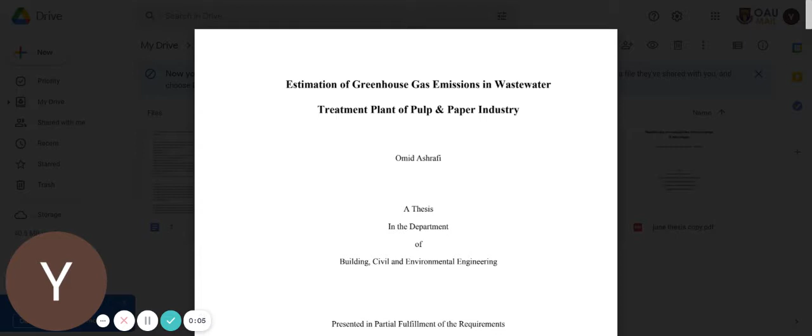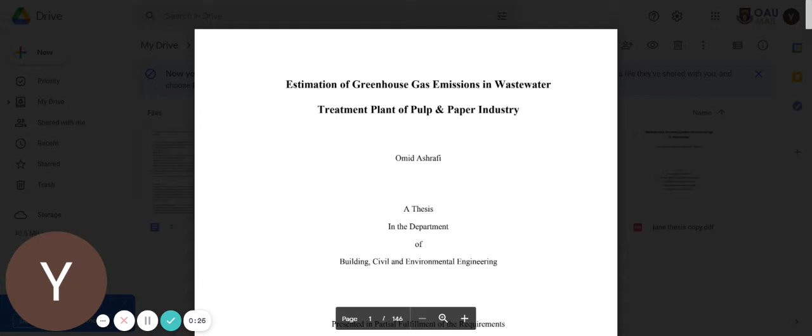Good day. Today we'll be reviewing the research, and the title of the research is Estimation of Greenhouse Gas Emissions in Wastewater Treatment Plants of Pulp and Paper Industry by Omid Ashrafi, a thesis in the Department of Building, Civil and Environmental Engineering, presented in partial fulfillment of the requirements for the degree of Doctor of Philosophy, Environmental Engineering at Concordia University, Montreal, Quebec, Canada. June 2012.

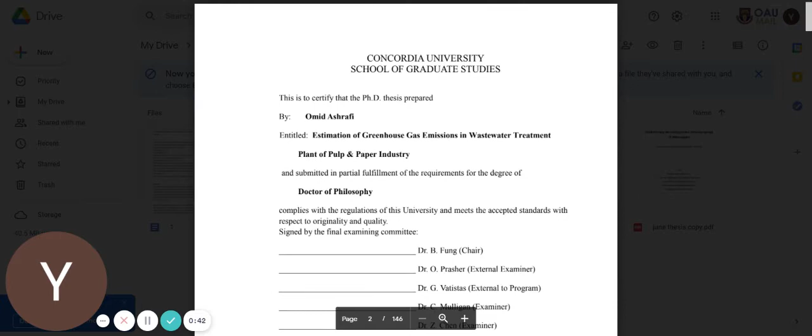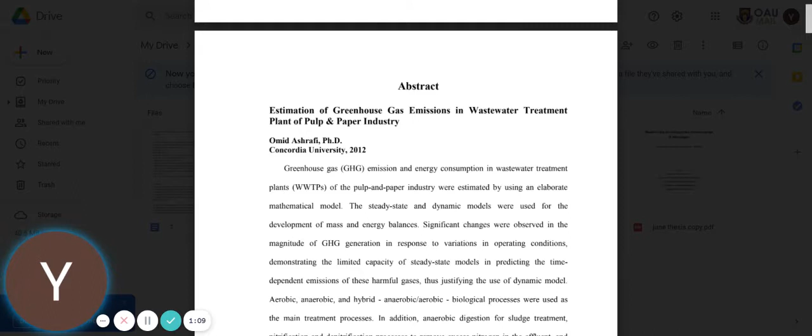This is the abstract section, and this abstract is the summary of the thesis. It says estimation of greenhouse gas emissions in wastewater treatment plants of pulp and paper industry. Omid Ashrafi, PhD, Concordia University, 2012. Greenhouse gas emission and energy consumption in wastewater treatment plants of the pulp and paper industry was estimated by using an elaborate mathematical model. So the author makes use of an elaborate mathematical model for his research work. The steady state and dynamic models were used for the development of mass and energy balances.

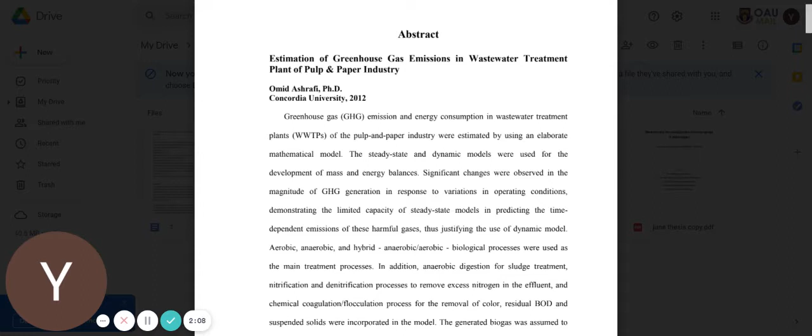Significant changes were observed in the magnitude of greenhouse gas generation in response to variations in operating conditions, demonstrating the limited capacity of steady-state models in predicting the time-dependent emissions of these harmful gases, thus justifying the use of dynamic model. Aerobic, anaerobic, and hybrid anaerobic-aerobic biological processes were used as the main treatment processes.

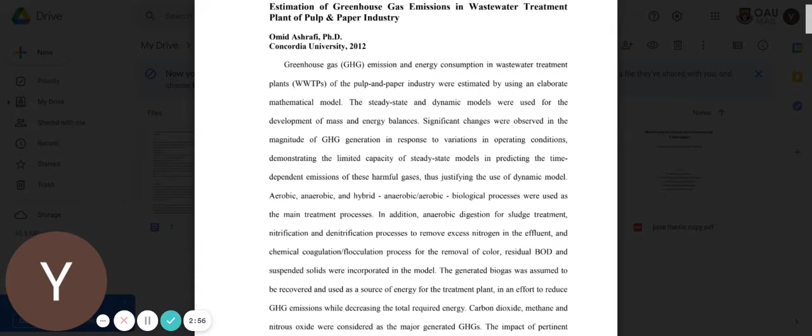In addition, anaerobic digestion for sludge treatment, nitrification and denitrification processes to remove excess nitrogen in the effluent, and chemical coagulation flocculation process for the removal of color, residual biochemical oxygen demand, and suspended solids were incorporated in the model. The generated biogas was assumed to be recovered and used as a source of energy for the treatment plants in an effort to reduce greenhouse gas emissions while decreasing the total required energy.

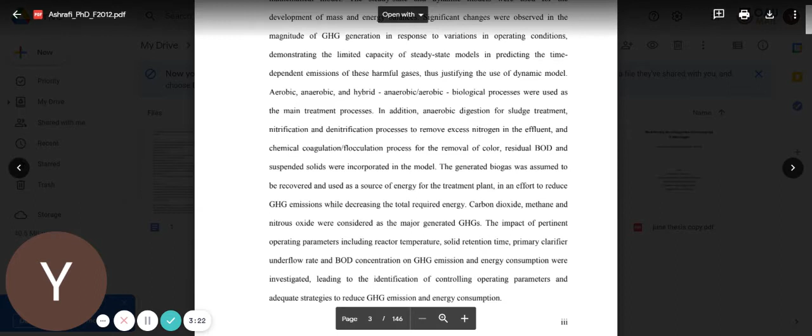Carbon dioxide, methane, and nitrous oxide were considered as the major generated greenhouse gases. The impact of pertinent operating parameters, including reactor temperature, solid retention time, primary clarifier underflow rates, and biochemical oxygen demand concentration on greenhouse gas emission and energy consumption were investigated, leading to the identification of controlling operating parameters and adequate strategies to reduce greenhouse gas emission and energy consumption.

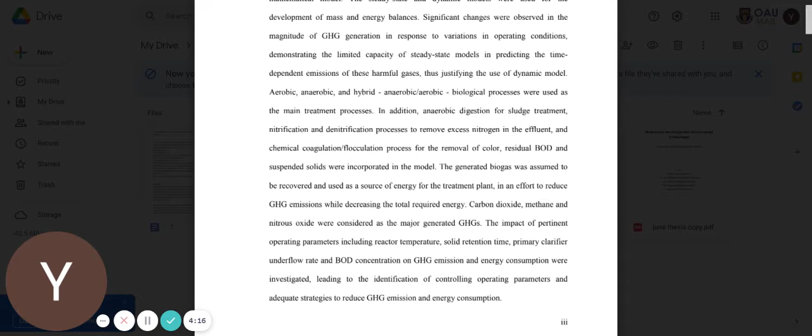The overall greenhouse gas generation by using the steady-state model was equal to 3,152 and 6,051 and 6,541 kilogram carbon dioxide equivalents per day by the three examined systems. The results showed considerably higher generation of sludge by the aerobic treatment system, amounting to 376 kilograms per day, compared to that produced by the anaerobic and hybrid treatment systems.

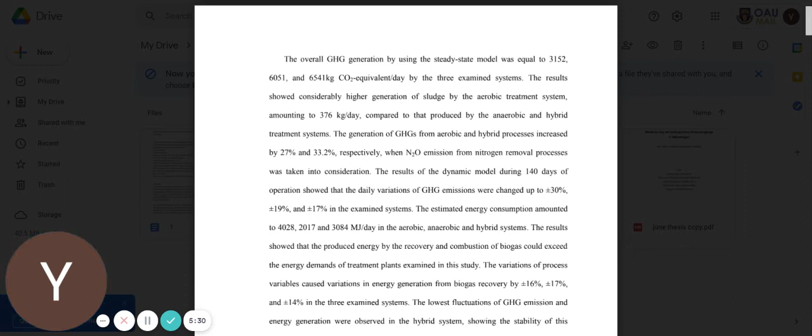The generation of greenhouse gases from aerobic and hybrid processes increased by 27% and 33.2% respectively, when nitrous oxide emission from nitrogen removal processes was taken into consideration. The results of the dynamic model during 140 days of operation showed that the daily variations of greenhouse gas emissions were changed up to ±30%, ±19%, and ±17% in the examined systems. The estimated energy consumption amounted to 4,028, 2,017, and 3,084 megajoule per day in the aerobic, anaerobic and hybrid systems.

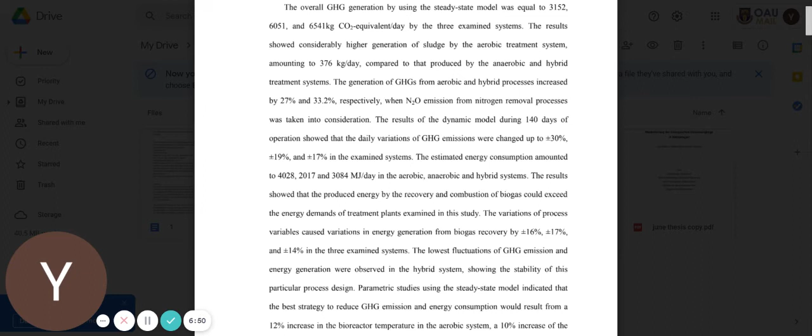The results showed that the produced energy by the recovery and combustion of biogas could exceed the energy demands of treatment plants examined in this study. The variations of process variables caused variations in energy generation from biogas recovery by ±16%, ±17%, and ±14% in the three examined systems. The lowest fluctuations of greenhouse gas emission and energy generation were observed in the hybrid system, showing the stability of this particular process design.

Parametric studies using the steady-state model indicated that the best strategy to reduce greenhouse gas emission and energy consumption would result from a 12% increase in the bioreactor temperature in the aerobic system, a 10% increase of the bioreactor temperature and a 5 days increase of SRT in the anaerobic system, and a 10% increase of temperature and a 5 days reduction of SRT in the anaerobic bioreactor of the hybrid system. Additional reductions in the greenhouse gas emission and energy consumption would result from a 50% increase of the primary clarifier underflow rate.

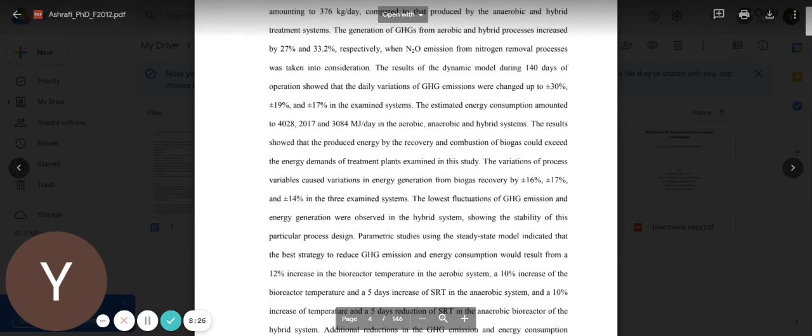So this is all about the abstract section. In the next video, we shall be reading out chapter 1 of this research.